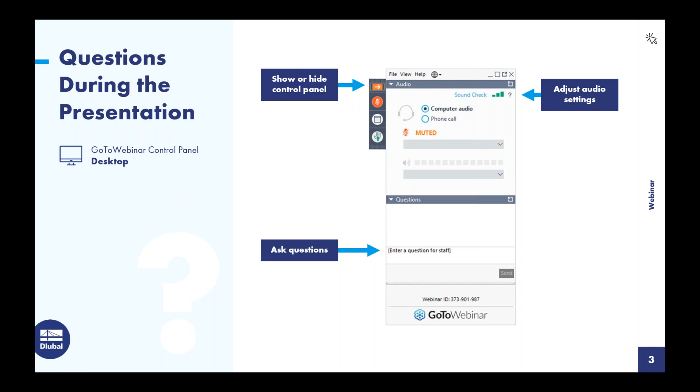Regarding the content over the next hour today, I do want to give a brief introduction to the dynamic analysis add-ons within our FEA program, RFEM 6. We will be taking a look at the natural vibration analyses of our structures utilizing the modal analysis add-on. And we'll also introduce external excitations over time utilizing our new time history analysis add-on in RFEM 6. We'll be working through a couple of examples.

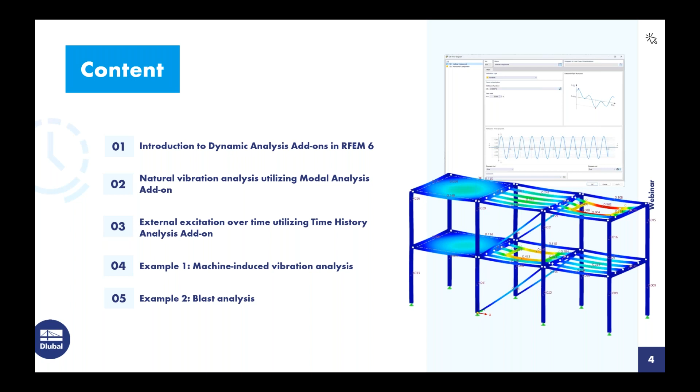The first is going to be machine-induced vibrations with the structure shown over here on the right-hand side of the screen. And finally, a quick example at the end to showcase a blast analysis, also utilizing that time history analysis add-on.

So for those of you not familiar with our program configuration, RFEM 6 is the base program that allows us to fully model the structure where we have access to the materials and cross sections from the various standards. We can load the structure and run a full static analysis. But when you need dynamic analysis capabilities, it will require one of the 4 add-ons listed here. The first is the modal analysis add-on. So this allows us to calculate the mode shapes of our structures and determine the natural frequencies, periods, and angular frequencies of the structure. So this is a prerequisite for the additional add-ons that you see listed here.

The second is a response spectrum analysis. So this is a seismic analysis according to the ASCE 7, the NBC, and other international standards that we offer. We also have the recently released pushover analysis. This is a nonlinear analysis for seismic deformation behavior, and currently this is according to the N2 method. And finally, we have our linear time history analysis. So this is to introduce external excitations as a function of time. So today we'll be working in both the modal analysis add-on as well as the time history analysis add-on.

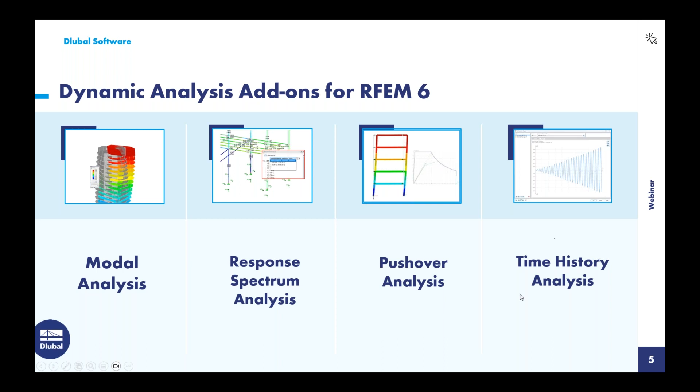So to turn here to the features within the time history analysis, we certainly have improved the integration and the workflow in our new version RFEM 6. When we compare this to RFEM 5, it was a little bit of a 2-part process, quite a bit different to open up the dialog box, then to define all of the dynamic time history analysis settings. Now you'll see in RFEM 6 a much more fluent workflow where we can better see that add-on integrated in the main program. We can combine user-defined or function time diagrams with nodal, member, surface, free, and generated loads. So the point being that we have the ability here to include many different load types in correlation with these time diagrams. We can also combine multiple independent excitation functions for one analysis. We'll see this with our first example today.

We do offer the linear implicit Newmark or the linear modal solvers. And it should be known that currently in the program all nonlinear elements for a time history analysis are going to either be ignored or converted to linear elements. So for example, if you have failure in uplift for a support condition, this will simply be converted to a standard support for that dynamic analysis. Same concept with a nonlinear tension-only member. Internally, this will automatically be converted to a truss element. We can consider structural damping with the Rayleigh damping coefficients or the Lehr's damping values.

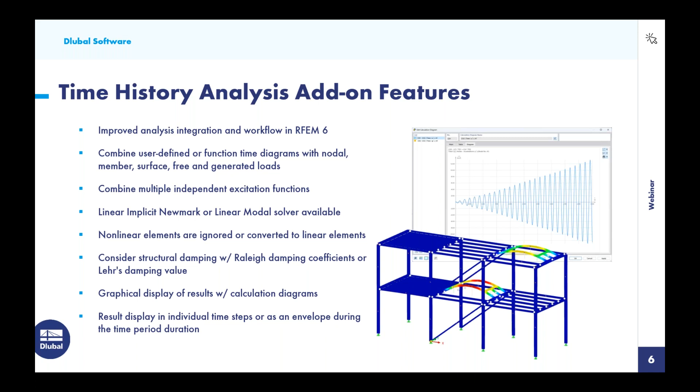And finally, when we do run our calculation, we'll see an output of the graphical results displayed, but also we can create what we call calculation diagrams. So we see a calculation diagram shown over here on the right-hand side, which just gives us a better idea of what's going on with the structure over that total time duration. In addition, we can display these results for each individual time step or as an envelope solution during the entire time period. And we'll work through most of these topics today with our examples.

So we'll begin here with example number 1, where we are going to introduce these machine-induced vibrations with the steel industrial structure that you see here on this slide. We have 2 rotating machines, and you can see here where these machines are going to be placed. We have one at the upper level where this opening is on the right, and then at the first level here at the center, we'll place that second machine.

So these machines are operating at 325 rotations per minute. The mass of the machine is 2,000 pounds, or converted to 62.16 slugs. The mass of the rotor is going to be 700 pounds, which converts to 21.76 slugs. And the rotor is going to be operating at an eccentricity of 0.75 inches.

Therefore, we want to calculate the excitation frequency here. So we just simply take the 325 rotations per minute, we divide by 60 seconds, and we get a value of 5.42 hertz. So this is a really important number to remember and will come into play a little bit later on, but just remember this excitation frequency magnitude here. The angular frequency is calculated by simply taking the excitation frequency, multiplying by 2 pi, and we get 34.03 radians per second.

And finally, we want to calculate the centrifugal force. So the centrifugal force is the angular frequency squared, multiplied by the eccentricity, converted to feet, multiplied by the mass of the rotor in slugs, and we get 1.58 kips.

Now, in order to apply the centrifugal force at these openings, we simply need to divide here by the total length of the members that make up this opening, and that's 33.6 feet. So we get a value here of 0.047 kips per foot that will be applied to the members. So this will make a little bit more sense when we go into our program RFEM to review the structure here.

So as you'll notice, we have our industrial steel structure, and the cross sections are composed of W shapes. So we have a W8x35, we have W6x9, and then for our diagonal bracing here, we have W4x13. We do have a couple concrete platforms here. If we take a look at the thicknesses, these are going to be 4,000 PSI concrete, 6 inches thick.

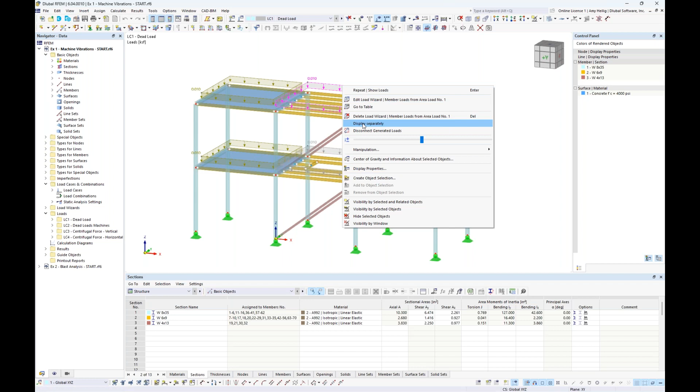So we also have the loads defined. So within the dropdown at the top, I have 4 total load cases at this point in time. We have our dead load, which is automatically going to include self-weight, but notice here that I also have applied an area load. So we have 10 pounds per square foot applied to the structure at both levels. The area load applied over on the right-hand side was used with our load wizard so that we could correctly allocate this to the members based on a one-way area load distribution. So we can right-click to display separately to see those magnitudes here.

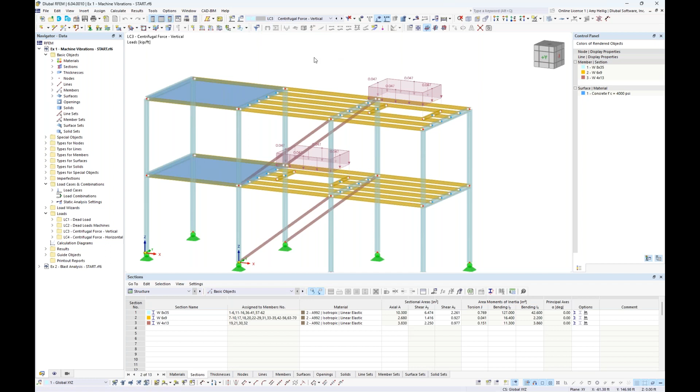Now, in addition to the basic dead load, we also have the dead load from the machine. So this is essentially just the force of the machine sitting on the structure, 0.08 kips per foot. Then going back to the PowerPoint, we have those 2 centrifugal force load cases. So we have load case number 3 here, which is that centrifugal force in the vertical direction. So notice this magnitude 0.047, which again just came directly from the PowerPoint.

If we're curious to know the total length of these members around the opening, we can hold down our control key to select all of these members. You can right click, and under the center of gravity and information, we do see here the total length given to us as 33.6 feet for these selected items.

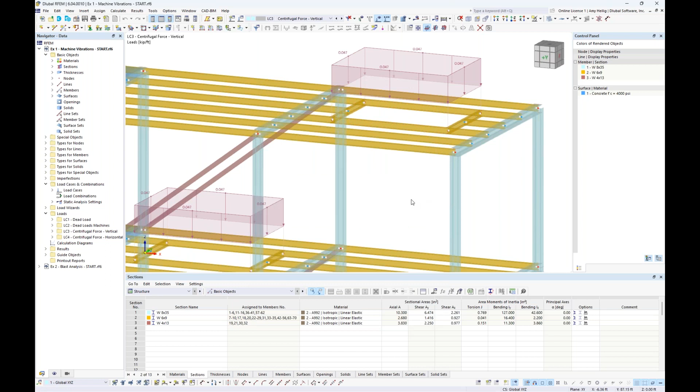So we have the centrifugal force in the vertical direction, and we also have the centrifugal force in the horizontal direction. So identical magnitude here of 0.047, but of course we want it to act in that horizontal position based on the global x-axis here on the structure.

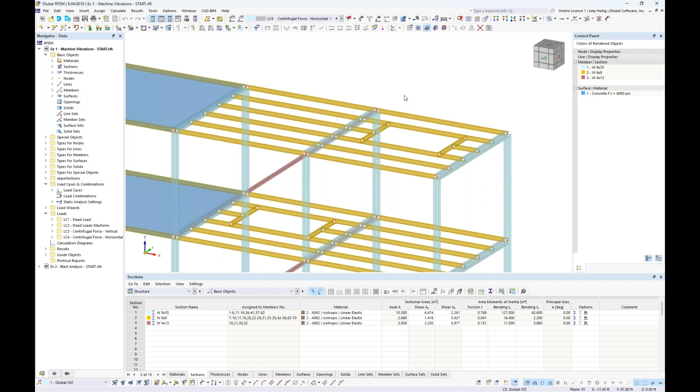So now that we have reviewed the structure as well as the loads, what we would like to move forward with now is our dynamic analysis. And we activate these add-ons by right-clicking here on the model name within the navigator to access our base data. Alternatively, we can launch the base data directly here within our quick tools up at the top.

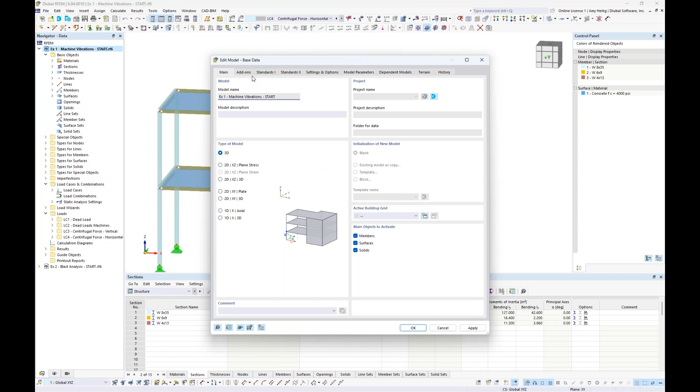So this is the dialog box that would be presented to us when we initially first create the model in RFEM, but we can always access it afterwards as well. Under the second tab here are all of our optional add-ons. So again, RFEM is responsible for the standard static analysis, but we want to activate our dynamic analyses add-ons. And for today, we'll go ahead and turn on the modal analysis and the time history analysis as well.

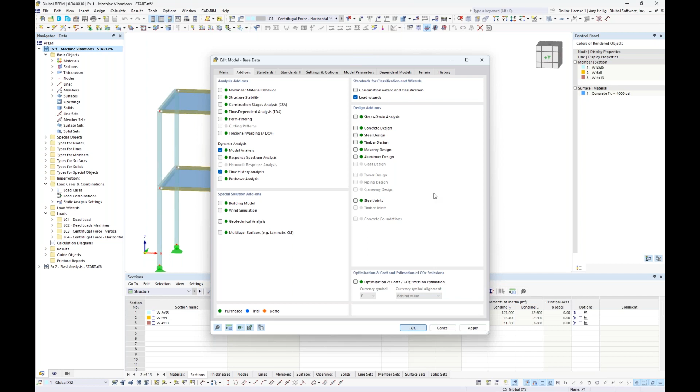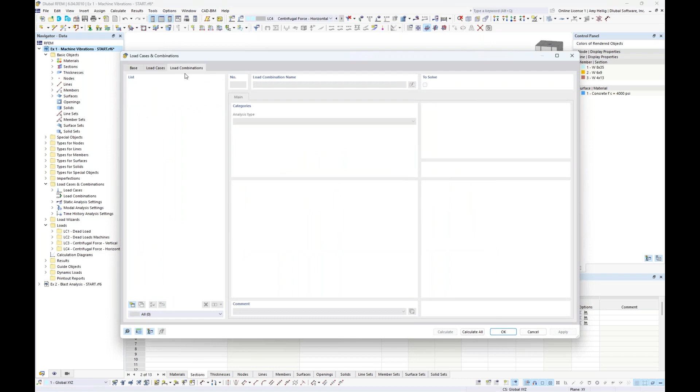So when I click OK, at first glance, it really doesn't appear that much has changed, but we want to move forward now with our modal analysis for this structure to determine what those natural frequencies are, mode shapes, and so on. So we're going to go into our load cases and combinations dialog box. And the initial step that I want to take is under the load combinations. We're going to create a new definition type here.

And in order to carry out the modal analysis, I do need to convert my dead load forces into masses. And I would like to combine the dead load from the structure, so that includes the self-weight, but also that 10 pound per square foot area load, but also take into consideration by adding the dead load of the machines. So both of these will be considered, and we can also rename this one for our mass combination.

So now that we have created this simple mass combination, we go back to our load cases here, and we're going to create a fifth load case. And we're going to give this one the name modal for modal analysis. So rather than carrying out a static analysis, we want to use our dropdown to select modal analysis. And this is available because I've activated this add-on within the base data dialog box.

So here we have some additional settings that we would like to set for the modal analysis in particular. And we do have two default options here. So you could either modify these default options, or you could create your own definition type down here in the lower left corner. For today, I'm going to increase the number of modes to a total of 15 for my calculation. We'll carry out the eigenvalue problem according to the Lanczos solver, and we're going to utilize a consistent mass matrix here, taking into consideration the mass in the translational X, Y, and Z directions, as well as rotational about the X, Y, and Z axes.

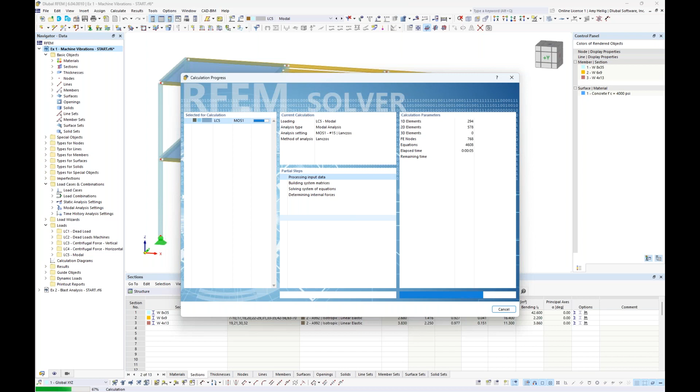So now that we have input in all of this information, we can run our calculation. So the program will quickly run through this modal analysis, calculating a total of 15 different mode shapes. And once the calculation is done, you'll notice that we get a fourth tab over here in our navigator where we can use our drop down here to select one of the 15 different mode shapes that we have solved for. And everything will sync up graphically here to show us our relevant shape.

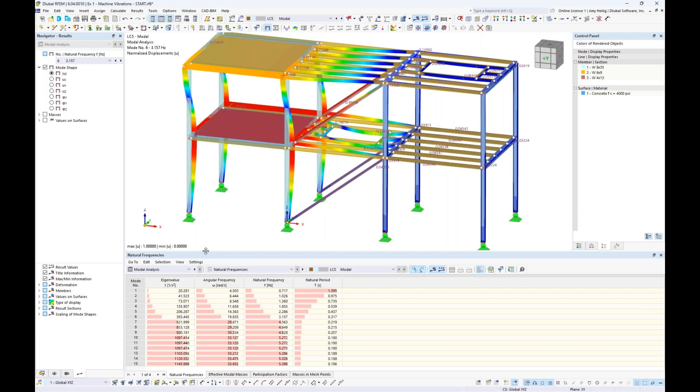But also we have the same information available to us here in the drop down within the table. So we can select the modal analysis. And again, those 15 different mode shapes are going to be shown that we can cycle through graphically within the table format. Now for each of these mode shapes, we also see the relevant angular frequency, the natural frequency, and the natural period.

So it's also important to take a look at the effective modal masses tab. So this tells us our mass participation for each one of these mode shapes, but also the total mass participation down here at the bottom for all 15 mode shapes combined. And we'd like to determine what are our dominant mode shapes for this modal analysis.

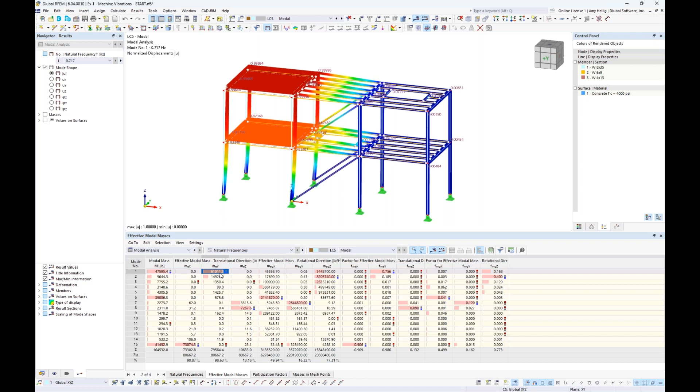So taking a look at mode shape number 1, we can see that this one has the most mass participation in the Y direction. So this is certainly a dominant mode in the Y direction. We take a look a bit further down, it looks like mode shape number 8 would be our dominant mode in the vertical direction or the Z direction.

Pretty relatively low mass participation though in this direction of only 13%. And then finally, further down, mode shape number 15. So this is our dominant mode here in the X direction. We have a total mass participation of 90.87%.

So keeping mode shape number 15 in mind, we go back to the natural frequencies tab, and what you'll see here is a natural frequency value of our structure of 5.388. So this is in Hertz, and if you remember back to the PowerPoint, I had mentioned to keep this value in mind, and you'll notice that these two magnitudes are very close together. So this should immediately tell us that we're inducing these excitations with an excitation frequency that's very similar to the structure itself, that we need to carry out a time history analysis.

And ultimately, we're trying to avoid what we call resonance. So most of you are probably familiar with this term, but it's essentially a phenomenon that occurs when a structure is subjected to an external force or vibration. In our case today, it's these rotating machines that's of similar magnitude to its natural frequency. And this typically results in an amplification of the vibration.

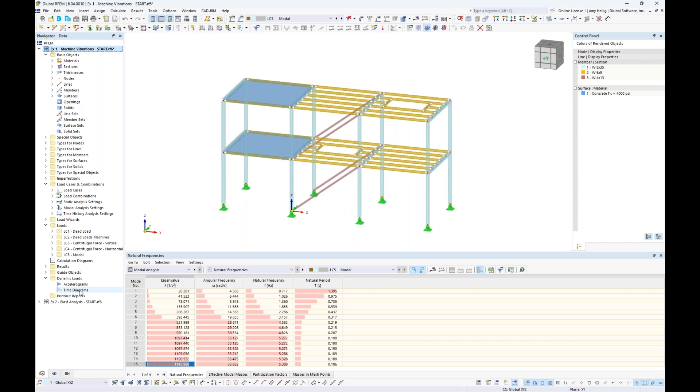So going back to RFEM and knowing that these two frequencies coincide, we'll now move forward from the modal analysis to the time history analysis. So we'll begin with the time diagram. So going back to the first tab here of my navigator, you'll notice that we have a new folder available to us under dynamic loads. And this is only available because I've activated that time history analysis add-on. And we see here where we can create our first time diagram definition type.

So we'll go ahead and click on this, and the dialog box opens where we can input either a user-defined time diagram, which you can see in table format. We can put in the time and we can put in the multiplier, essentially telling the program how this force is going to vary over time on the structure. Now, alternatively, we have the function option, which is what we'll be utilizing for this first example. We can go ahead and rename this time diagram if we would like as well.

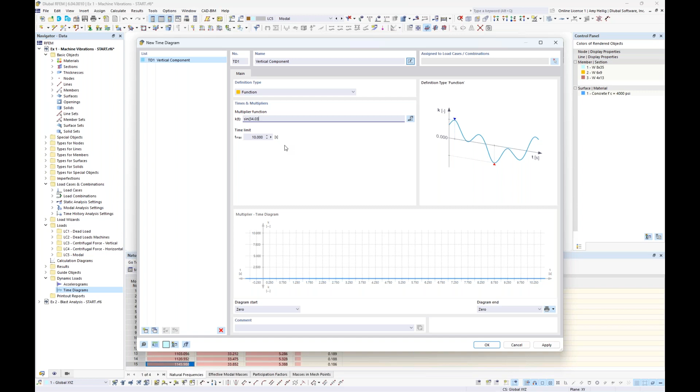So I'll call this one vertical component, and the multiplier function would now be input as a sine function. So remember, we have these rotating machines, therefore we want to represent this as a sine function where we input the sine of the angular frequency, which is 34.03 directly from our PowerPoint, and we multiply it by the time parameter. We'll go ahead and close these parentheses. We set the total time limit here to 10 seconds, which is just default. And we see our diagram populate visually at the bottom of this dialog box.

We then want to make a copy of this time diagram, and we're going to rename this one to horizontal component. Very similar multiplier function here with the sine of the angular frequency, but if you also remember back to the PowerPoint, we have this pi over 2 phase shift that's occurring between the horizontal and the vertical force. Therefore, in order to account for this directly in the formula, we will add 1.57 to account for pi over 2. Again, 10 seconds is adequate.

So if I hold down my control key and I zoom in here with my mouse wheel, we can see this diagram in a bit more detail. So for the horizontal component, you'll notice that at time equals 0, we essentially have 100% of that load acting on the structure. But as we move to a time duration around 0.04, we're going to have 0% of that horizontal load acting on the structure. Now, if we toggle to the vertical component, what we should see here is exactly opposite. At time equals 0, we have 0% of the vertical load. And at time equals 0.04, we have 100% of that load acting on the structure.

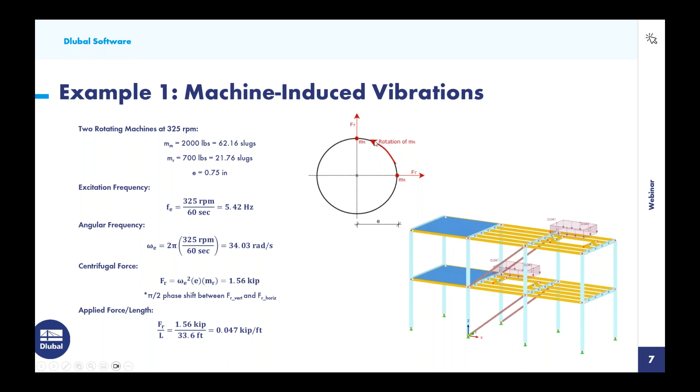So this all just goes back to this simple diagram in the PowerPoint, trying to represent these centrifugal forces as a function of one another. That again, we have 100% of the force acting in the horizontal direction, but at a phase shift of pi over 2, we want to in turn change this so that 100% of the vertical load is acting on the structure. So these time diagrams just relate these static centrifugal forces to one another and how they're going to vary over time.

So now that the time diagrams are available over here in our navigator, we want to go back to the load cases and combinations, where under the load combinations tab, we're going to create a new definition type here, and we can give this one a name of time history analysis. The analysis type is not static analysis, but rather time history analysis available in our dropdown.

And very similar to the modal analysis, we just need to input a few settings here. So we'll go into the default definition that's available to us, and notice that we have two options here for our analysis method, either the linear modal or the linear implicit Newmark. So we will be moving forward with the linear modal for this first example.

And this is certainly a more precise, quick, and recommended path forward for the analysis method if the structure has a low number of modes that have been calculated with the modal analysis add-on. This is also assuming that we have sufficient mass participation as well. But underneath the hood, that multi-degree of freedom system is going to be broken down into many single degree of freedom systems, and the solution of that decoupled system is then going to be calculated with the implicit Newmark solver.

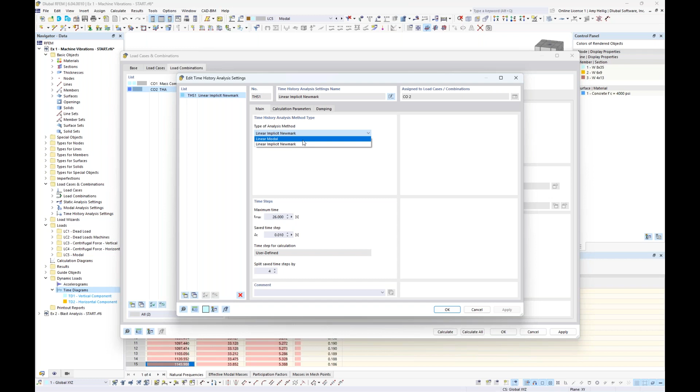Now, the maximum time is the total time duration that I would like to consider for this time history analysis. And for our example today, we will choose 5 seconds. The save time step is the number of steps you would like to export back into RFEM to view the results. So obviously we don't want to set this to something too small because it's just going to take the program a lot longer to populate all of those results. So we'll leave this as 0.01.

Now, the split save time steps is further going to divide the save time steps, but this is what's actually used in the calculation itself. So I'm going to further divide this by 10 so that technically with the actual calculation, I'm calculating every 0.001 seconds, but I'm only going to export 0.01 seconds for my results.

Now, additionally, you'll notice that we do have a damping tab, and for the linear modal analysis, we have both Lehr's damping available where we can directly input the damping constant, quite simple. We also have the Rayleigh damping where we would need to input the alpha and beta coefficients. Now, alternatively, just to show you, under the linear implicit Newmark, you'll see under damping that only Rayleigh is offered. So that alpha and beta is required for this calculation method.

But we do have a function in the program where we can automatically calculate from Lehr's damping. So you'd want to determine from the natural frequency analysis, what are your two dominant modes? And from these two dominant modes, what are the relevant natural frequencies? What's the Lehr's damping constant you're trying to achieve? And then the program will automatically calculate both these alpha and beta coefficients. But going back to linear modal, initially we're not going to put in any damping for our first calculation here.

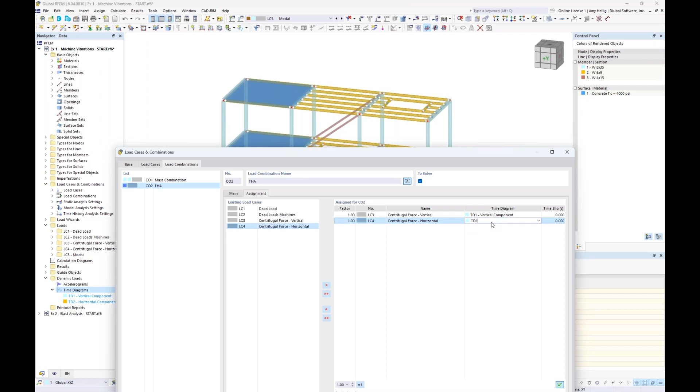And the first centrifugal force in the vertical direction is, of course, going to be related to my time diagram in the vertical direction. But my centrifugal force in the horizontal, we want to set this to the time diagram in the horizontal direction as well.

So now that we have set the static load cases to the relevant time diagram, we would like to run this calculation. Now we don't need to rerun the modal analysis. The program has already solved for this. Our results are saved here. And then we move on to the time history analysis, taking into consideration the full 5 seconds of how these rotating machines will be directly applied to the structure. So once this is done solving, we are presented yet again with our results directly within our navigator on the left for time history analysis, as well as in our table, we see time history analysis available here as well.

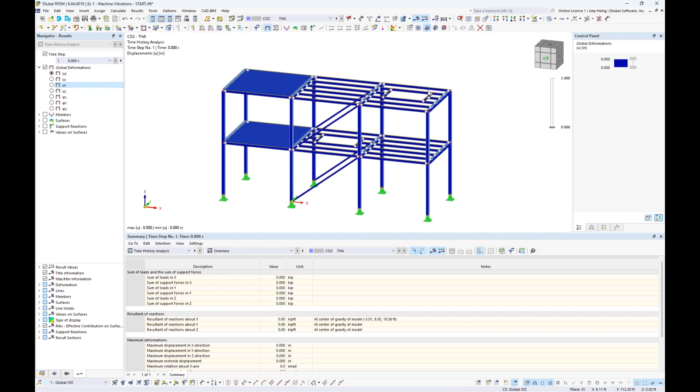So initially you'll notice that the program allows us to view, let's say, the global deformations of the structure based on the relevant time step. So currently at time step 0, nothing's going on with the structure here in terms of the deformation. But as we continue to cycle through these time steps, that's where we start to see the relevant deformed shape based on those centrifugal forces acting on the structure.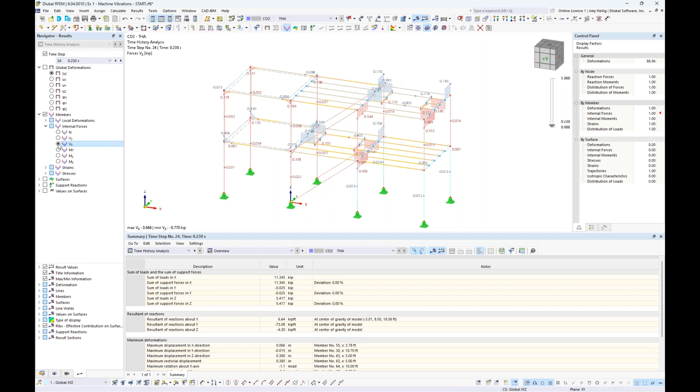And the same concept is available for other result information like our member internal forces. So for example, we can view the axial forces at this particular time step, or we can view bending moments, or perhaps we want to view the shear forces. Surface internal force information is available, and also support reactions. So we can turn those on again for this particular time step.

And all this information is also available here in table format. So we can filter here to the results by the member, for example. And as we click through this table for the internal forces on the member, what else you'll notice is that the program syncs up automatically here to tell me exactly which member I'm looking at. And that red arrow is going to point to where the controlling internal force is that I'm currently viewing along the length of the member.

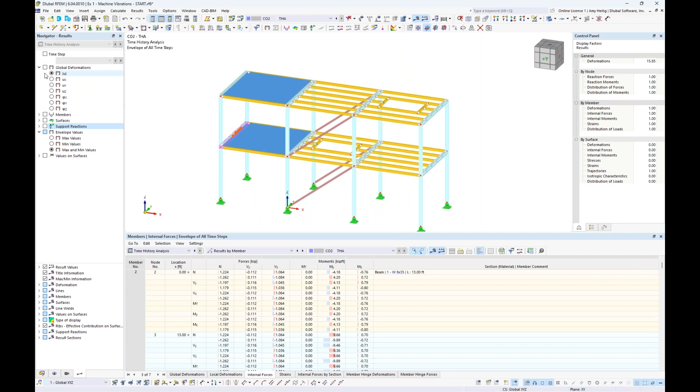So this is for each individual time step, but if we're rather interested in an envelope solution for the full 5-second duration, we can just simply turn off this checkbox. So now the program is going to give us our results here over the total time duration. So we can turn on, for example, the global deformations.

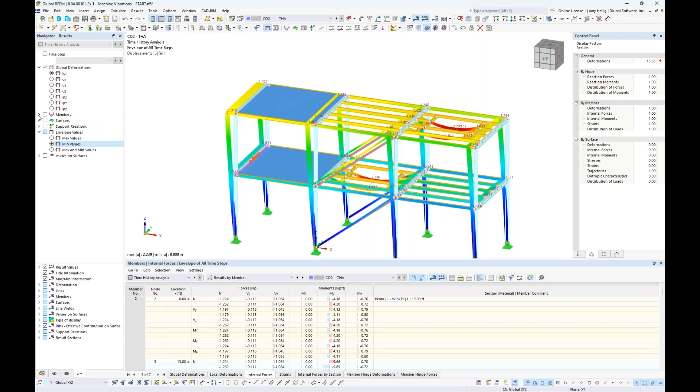And if we look graphically, we're seeing 2 deflected shapes here. And this is just simply because you'll notice under the envelope results that both the max and the min values are currently turned on. If we're interested in only the max deflection, we can toggle to this, maybe only the min deflection. Same concept for our member internal forces. So for example, if we take a look at max and min for our axial forces, you're going to see both of these values displayed on the member, but we could certainly toggle to any one of those other options.

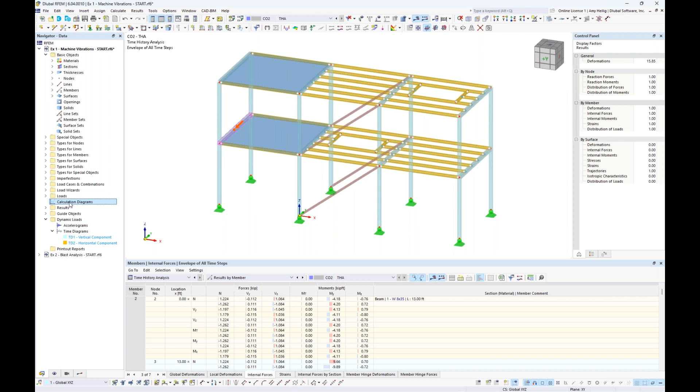Now, all of this information shown graphically is certainly very helpful, as well as in table format, but I do want to go back to the navigator here to discuss the calculation diagram. So I'll go ahead and collapse some of these folders, and you'll notice the calculation diagrams is available here directly within the navigator list. And this is going to be highly used for any time history analysis. So this is going to give us more information about the structure's behavior over the total time duration.

So under the first definition type here for my calculation diagram, we want to toggle this to a time history analysis. Now, the program is automatically going to display a diagram here based on the max deformation. But notice within this dropdown that we really have a lot of different options to choose from, including nodes for the global deformation, maybe want to view the accelerations on the nodes or member internal forces.

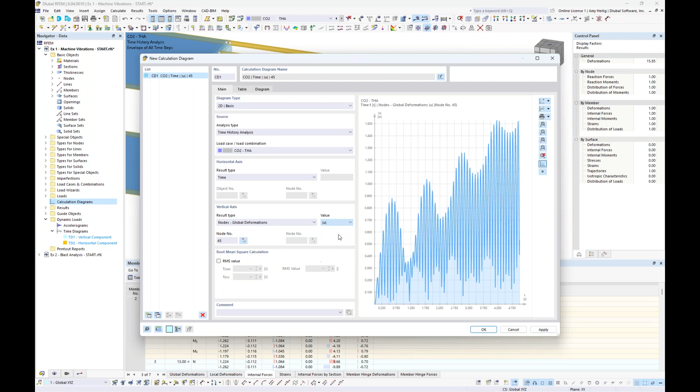So I'm going to start here with the global deformations of the nodes, and I'm going to pick this particular node up here at the opening where one of my machines is sitting. And currently the value shown here under this second dropdown is going to be the total deformation, considering all three directions, X, Y, and Z. But instead, I'm going to view the deformation in the X direction only.

And when we take a look at this, we can clearly see that resonance is an issue, that this deformation in the X direction is just continuing to grow as time goes on. And likely if we were to expand the total time for a time history analysis, it would just continue to grow. We see here a value of 1.4 inches.

So if we toggle instead to something like our acceleration on this node, and we want acceleration in the global X direction, again, the diagram looks very similar. So if we take a look at the total magnitude here of this acceleration at the end of the 5 seconds, it's 141 feet per second squared. So this is certainly not an acceptable value.

And when we're interested in what are some of the recommended acceleration limits, there's plenty of resources out there. If we take a look at AISC Design Guide 11, for example, it really depends on what your structure is going to be used for. Something like an office is going to have a much lower tolerance value for acceleration versus something like a gym.

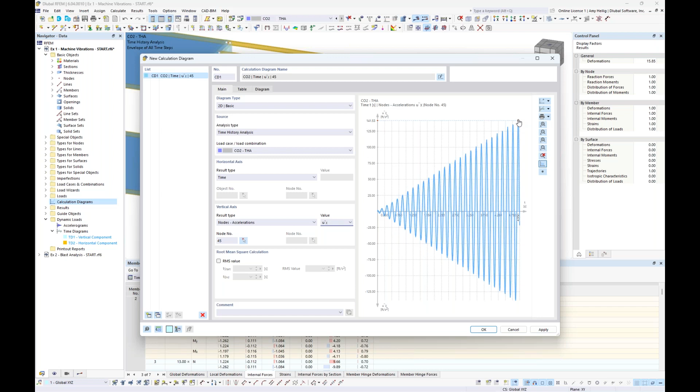But somewhere at the low end, it should be around 0.5% G, and somewhere at the higher end of acceptable tolerance values here is 5% to 10% G. But in any rate, we are far over that with this particular structure. So we need to make some modifications. And the first thing that I would suggest doing is to consider damping.

So we'll go back to the load combination here and that time history analysis. We've already been within these settings before under the damping. So this time we want to consider using our dropdown, the Lehr's damping constant. So for this particular steel structure, we'll go ahead and set this at 0.02. So we'll click OK. The program tells us we need to delete our results and rerun the calculation.

Now, nothing changed with the modal analysis. We should see the same results there. But now with this time history analysis, we've introduced the damping matrix in consideration with the dynamic analysis. So we should see slightly different results here now that we're considering damping.

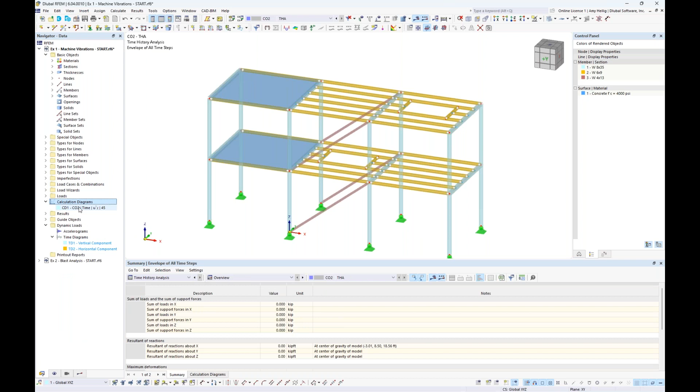So now that this is finished, we will immediately go back to that calculation diagram. So we can see it listed here in our navigator. We don't need to redefine it. It's already been saved. We're currently looking at the acceleration of node number 45 in the X direction, and our diagram certainly looks slightly different. We're not seeing maybe those accelerations growing linearly, but rather leveling off.

If we take a look at the total magnitude of the acceleration, it is around 40.79 feet per second squared. So this is probably still an issue. The acceleration is far too high. So we need to continue to make additional modifications to this structure.

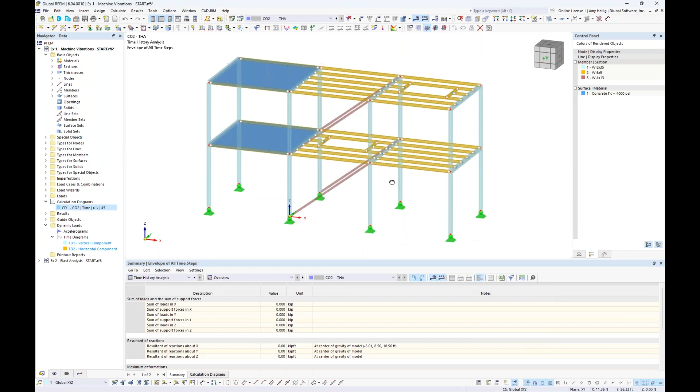Well, the obvious choice would be to change out some different cross sections here. Maybe we can modify the cross sections, which will in turn affect the stiffness, and our modal analysis may output different natural frequencies now that don't necessarily match the rotating machine. So we can do this directly with the cross sections listed. So for example, these diagonal braces, W4x13. We could simply double click and exchange out to a different W section.

But the question might be, well, do we go with a cross section that is bigger? Do we go with a cross section that's smaller? And we could certainly trial and error and keep running through these different calculations. But I'd like to show you a different method, which is available under the special objects folder. It is called the structure modifications.

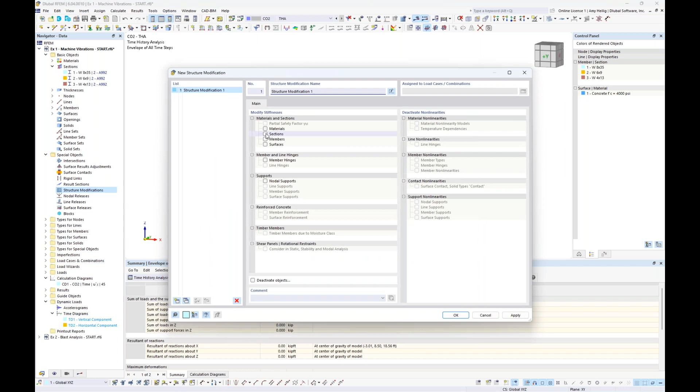And we can go ahead and double click to create our first structure modification where we activate the sections option. And we get a new tab here under sections with our 3 different W sections, including the W4x13 for those diagonal braces. And we have the ability to directly apply a factor to the cross-sectional area, which in turn is going to increase or decrease the axial stiffness of the member used in the calculations. So rather than exchanging out the cross-section, we can just more or less play around with the stiffness properties directly to see how our structure is affected.

So under the W4x13, the first thing I want to do actually here is to give it a name. We'll call this one double stiffness, and the area factor will be set to 2.0. The area in the Y is also set to 2.0, and area in the Z is 2.0. So again, just increasing the stiffness twice the amount here.

Now we're going to make a copy of this structure modification, and we'll call this one half stiffness. So in this scenario, instead of applying a factor of 2.0, we'll apply a factor of 0.5, just to again see how the structure responds to maybe a smaller cross section without actually swapping out those cross sections quite yet.

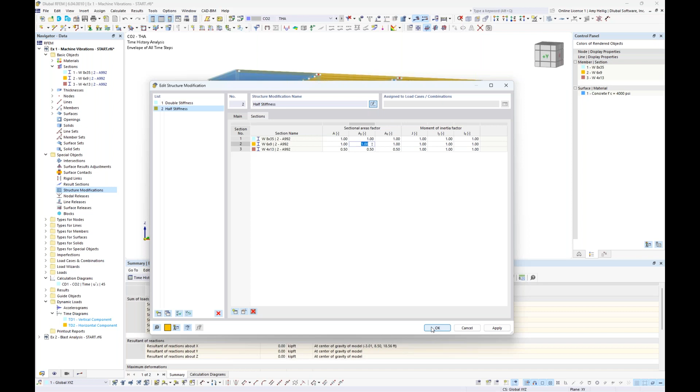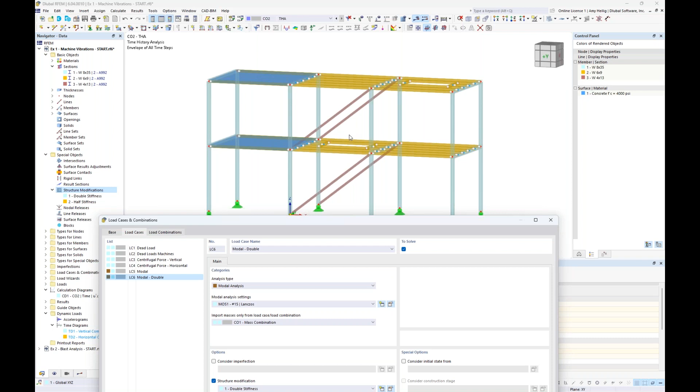So now that we have these structure modifications shown here, we can go back into our load cases and combinations. Under the load cases, remember we have our modal analysis with no structure modification sets, just originally the results that we have already looked at. But I'm going to make a copy here, and I'm going to call this one double for double stiffness. Under the structure modification, we can turn on that definition for double stiffness that we just created. Again, where we're going to increase the axial stiffness times 2 for these diagonal braces.

I'm going to make an additional copy here, and we're going to rename this copy half so that we can activate here half the stiffness for the diagonal braces. Well, it's not just enough to do it for the modal analysis, but we also need to apply this to the time history analysis. So again, I can simply create a copy here, and with our original time history analysis, we will first rename it, but notice that with the linear modal, we can now import in the modal analysis where we have increased the stiffness by 2.

The program automatically detects that we also want to apply this structure modification to the time history analysis, because remember we have these static load cases that vary over time. So we need to also apply that stiffness modification to this scenario here. And we make an additional copy, and in a similar manner, we call this one half, and we're going to import in the modal analysis with half the stiffness set. And then you can see here the structure modification half stiffness is also set for the time history analysis.

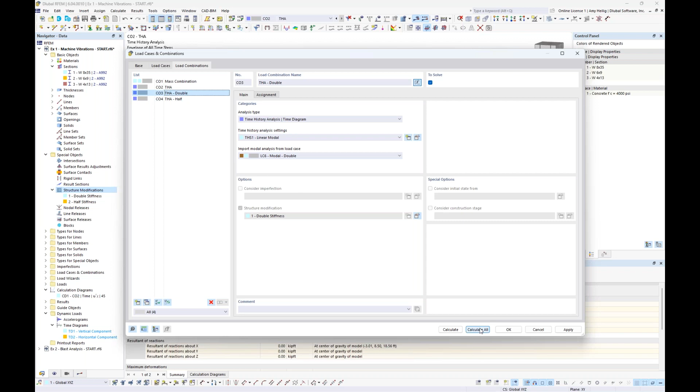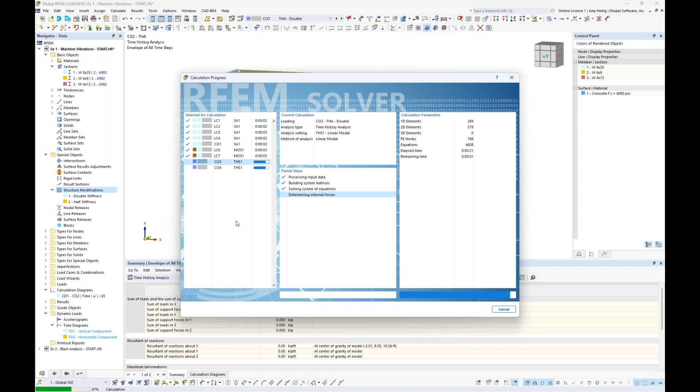Okay, so now that these are run with the relevant stiffness properties or modifications set, we can just go ahead and click calculate all. So this is going to cycle through first my load cases here, which is fine. We're not really concerned with them. But then you'll also notice that the program is going to go ahead and calculate both of those modal analyses with the stiffness modification set, and then we're now running through both time history analyses with the additional stiffness modifications.

So the first thing that I'll go to now that the calculation is done is those calculation diagrams. So we'll go ahead and double click on here, and we see the same calculation diagram, but that's fine because we're still referencing that original time history analysis with the same cross sections, same stiffness, nothing changed.

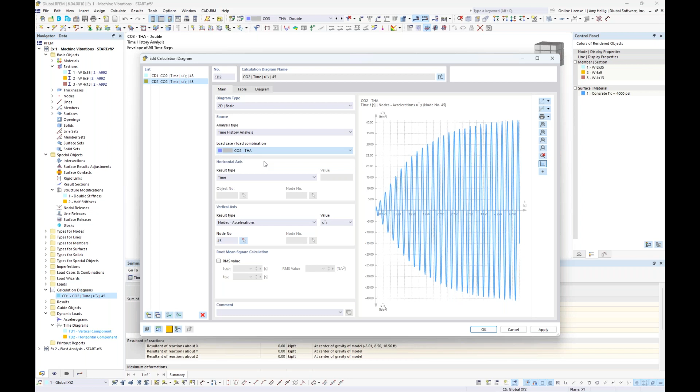We make a copy of this, and this time we want to reference the time history analysis with the double stiffness. And now we see that our acceleration of that node in the X direction looks quite different. No longer do we see that acceleration growing, but rather it remains pretty constant over the 5-second duration. And if we take a look at the total magnitude of the acceleration, it's now around 0.4 feet per second squared. So this is much better and well within those tolerance values.

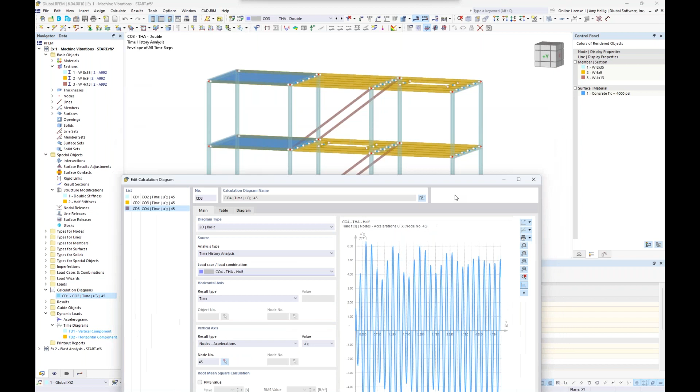Perhaps we make an additional copy here to select half the stiffness. Again, resonance is no longer an issue. So we don't necessarily always have to increase the cross-section size. Even decreasing a cross-section size may allow you to overcome issues like resonance.

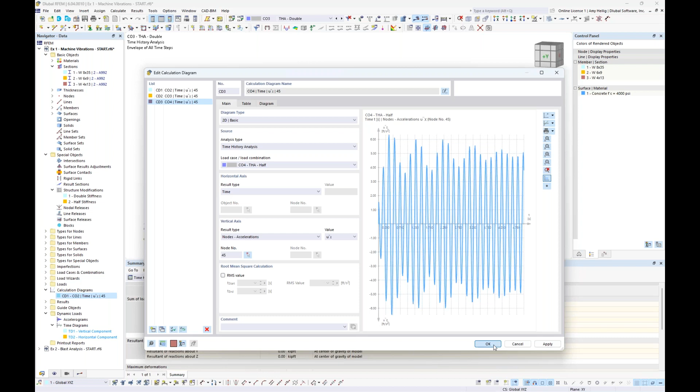However, we do need to still take a look at the total acceleration values, a little bit higher here, around 4 to 5 feet per second squared. So it'd be up to you as an engineer to determine, okay, is this within the allowable range, or do we need to make further modifications? But once we have an idea about the general stiffness options based on those factors, then we can go in and make modifications to that W shape.

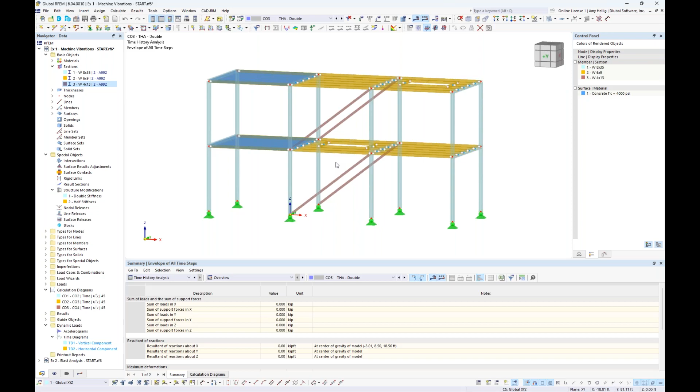Okay, so that will conclude our first example today with these induced vibrations on the structure. We now want to turn to our second example. So we'll go back to the PowerPoint here, and this is going to be blast analysis. So with the blast analysis, we certainly can utilize the same add-ons, a time history analysis add-on, to replicate a blast analysis on a structure. So very simple example for today.

You can see it outlined here with the reference given at the bottom of this slide, that we have some type of cylindrical structure. So this is the plan view of that cylindrical structure. Perhaps we have an explosion somewhere in the exterior here. Therefore, we have this incoming pressure wave. And you'll notice that based on this reference, the incoming pressure wave, the magnitude of this pressure varies as we move around the perimeter of the structure.

So ultimately, we want to replicate this in RFEM, and we do so with what we call a free load varying along the perimeter. And here's just a couple screenshots that we will visit in just a minute within the RFEM model itself, but we do have the ability here to replicate this loading.

Now, when we talk about blast analysis, it's quite common to represent the blast as a triangular shaped development of load versus time. And that's what you'll see here at the bottom of the page, that over a very short duration of time, 0.15 seconds, we're going to see that load increase linearly to 100% for the pressure wave, and then in an equal manner, it's going to dissipate quite quickly at 0.3 seconds total. So we also want to replicate this with a user-defined time diagram. So you can see that triangular shape shown over here on the right-hand side.

So let us go into the RFEM model directly, where we'll go ahead and toggle to this open model here. So you'll notice that for this very simple example today, we have a 32-foot high cylindrical structure, 33 feet in diameter. Really consists of a single surface here. And if we take a look at the thicknesses, it's going to be A36 material, 2 inches thick. Also, we have a pin support down here at the bottom that is applied as a line support.

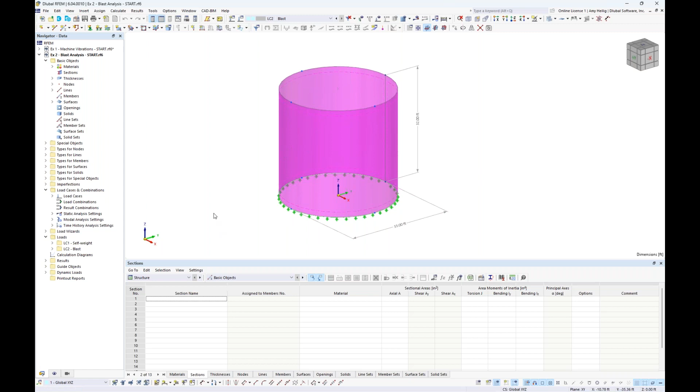We also have the loading applied. So we have 2 simple load cases for this example. We have the self-weight, which no additional loads are applied to the structure, just internally that self-weight is considered within this load case automatically. But then we also have that blast load. So this comes from the PowerPoint and the reference mentioned, where we wanted to vary this load around the perimeter.

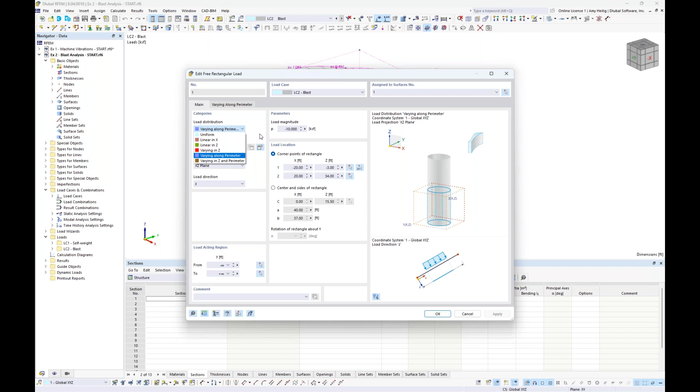And we take advantage here of what we call a new free rectangular load. So with the free rectangular load, if I go ahead and double click on the options here, you'll notice that the load distribution can be set to varying along perimeter. And I also wanted the load to act normal to the face of the surface. So this is based on the local z-axis of the surface itself. We also need to input in here a reference load magnitude, so -10 kips per square foot.

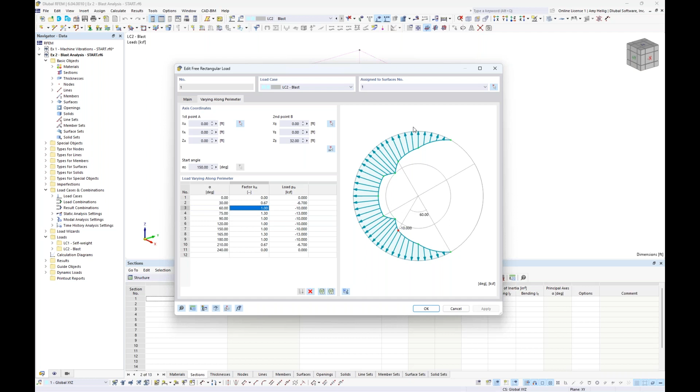So taking a look now at the second tab that is available, we see in table format where we can input in degrees. So this first column, 0 degrees, 30 degrees, 60 degrees, and so on. We can also input the relevant factor. So again, this just comes from the PowerPoint, and then the program will automatically take this load magnitude here and the parameters set in this table to calculate the total load acting on the structure and how it should vary, again, as we kind of move around the perimeter. So that's a little bit about just the basic static load that is applied here as a general load case.

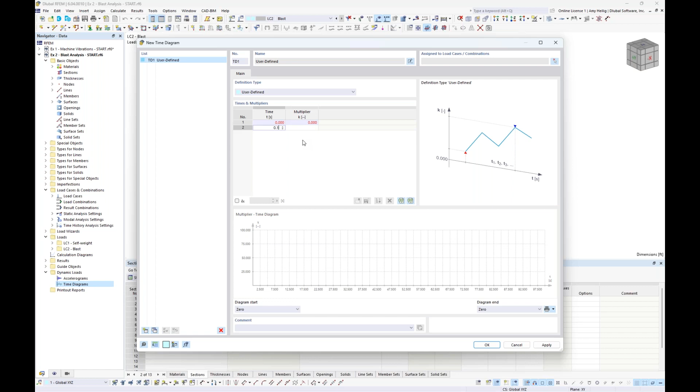Now, we want to define that time diagram. So I will go into my navigator over on the left in the dynamic loads folder, where very similar to the last example, we just double click here the time diagram. And this time, instead of using the function, we want to set this to user defined. And for a very simple application today, at time equals 0, we want a multiplier of 0. At time equals 0.15, again, just referencing the PowerPoint, we want the multiplier to be 1. And then finally, at time 0.3, we would like the multiplier to be 0.

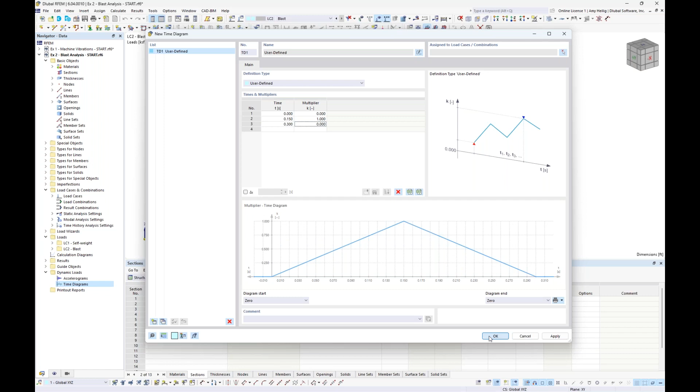So we see this triangular shape displayed here that will be used to tell the program how this static pressure load that's shown here in the background is going to vary over time. So a very quick impulse, so to speak. So we have this single time diagram defined. So we click OK, we see that listed over here in our navigator. And we want to go into the load cases and combinations.

So I will preface that for this particular time history analysis, I'm going to run a linear implicit Newmark solver. So this is in contrast to the linear modal solver. What this means is that I don't need to run a modal analysis. So everything that we saw in the first example, that modal analysis was required because we were running the modal solver. And unless we're interested in determining what the structure's natural frequencies are, periods, mode shapes, and so on, we really don't need to run the modal analysis calculation here in the load cases for a linear implicit Newmark solver. So immediately we jump to the load combinations instead.

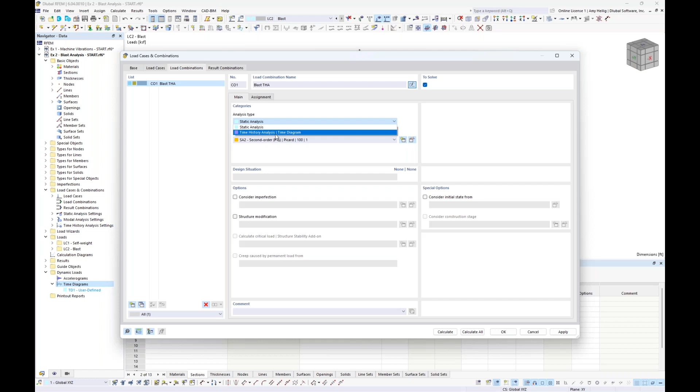We create our first definition type here. And the load combination name can be set. We will call this one BLAST time history analysis. You'll see here that the analysis type is set to time history analysis rather than static. And very similar to our last example, we have our settings. Now, the type of analysis method here is set to linear implicit Newmark. The total maximum time is going to be 1 second. So typically with a blast analysis, we don't need to carry out the time history analysis over a long duration of time just because that load impulse is so quick. So 1 second should be adequate here.

The save time step will be set at 0.01. And then we further want to split the save time step here by 10. So remember that this is the value that's actually used here within the calculation. So we'll technically be using 0.001 for this linear implicit Newmark calculation, but we're going to export out every 0.01 seconds into RFEM to view those results graphically.

Under the calculation parameters, because we are not running that modal analysis, you'll also see here just some additional settings specific to the mass matrix for the linear Newmark solver. The type of mass matrix will be set to consistent, for example, acting in the translation directions as well as rotation about those global axes. And then we also have the same mass conversion type, similar to what we saw in the modal analysis in example 1.

And finally, we have the damping. So for this example, I'm not going to consider damping, but it's worth pointing out again, remember that with the Newmark solver, we only have the ability to define Rayleigh, or we can allow the program to convert from Lehr's damping. Again, we'll leave all of these values as 0.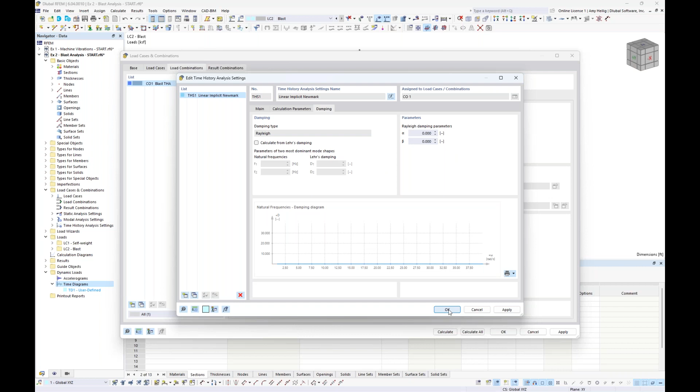So we need to import in the masses from either a load case or a load combination. We don't have any mass combinations that we created for this example. Rather, I'm just going to import in the masses from self-weight alone, and that's available within this first load case.

And finally, we have the assignment tab where we take this blast load, and we can see it displayed on the structure here as a standard static load. And we relate this to the user-defined time diagram. And that was that triangular development of load versus time, which is automatically set here because we only have one time diagram defined now in the model.

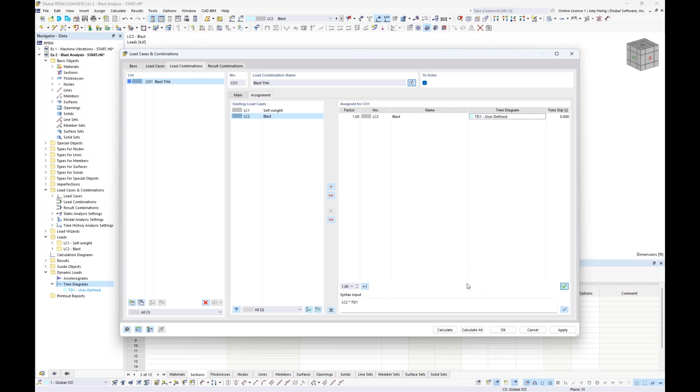Okay, so now that these are set and correlated, again, how this pressure is going to vary over time, we are going to run the calculation. It should be known that we're not running through the modal analysis, but rather directly to that time history analysis. With the Newmark solver, it does take just a little bit longer.

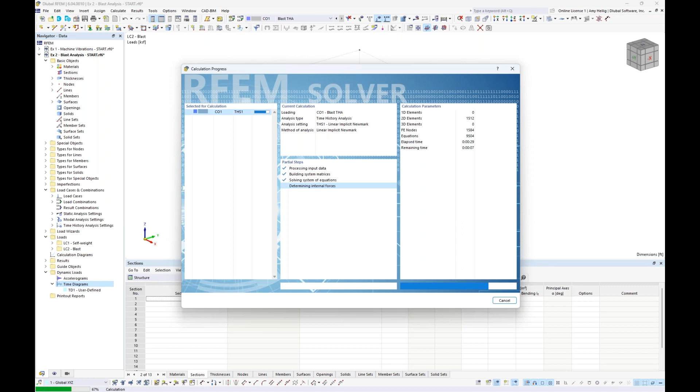And I had mentioned that when we were talking about the modal solver, it is a bit quicker, it's more precise, but can only be used when we have adequate mass participation and we're carrying out that modal analysis with relatively low number of mode shapes. But regardless, we'll carry out the time history analysis here for the full 1 second duration.

And once those results are done solving, we see them presented here back in RFEM. So we'll go ahead and turn off the display of our loads. So you'll notice initially we have the time history analysis available in the navigator, same concept for the table, just like what we saw in example 1. And if we toggle to the time duration of 0 seconds, as we would expect, that pressure wave has not been applied to the structure yet.

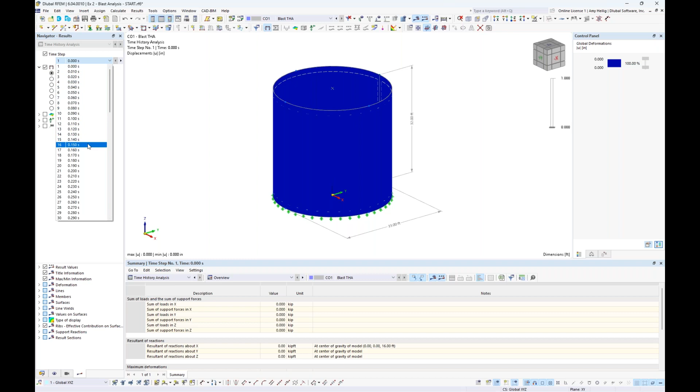But if we cycle down here and choose time equals 0.15 seconds, this should be the highest global deformation of the structure because that's 100% of that pressure wave being applied. And then as we cycle through these additional time steps further out, we're going to see that deformation slowly decrease because we're going to apply less and less of that pressure on the structure.

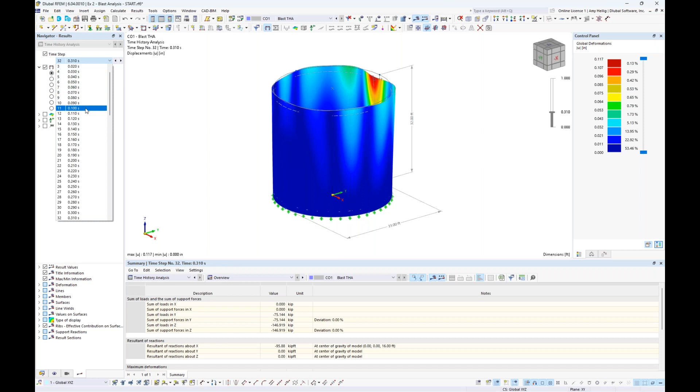We also can view information, if we maybe back up here to 0.15 seconds, such as the surface stresses. So we can activate here the stresses. Maybe we're interested in the von Mises stresses. So we find that under the equivalent stresses here, we can activate von Mises, and we can go ahead and see this graphically within the structure. Now, this is all for this particular time step.

So again, keep in mind if you're interested in an envelope solution, let's say showing the maximum von Mises stresses, we would just need to simply turn off this checkbox. This is going to show us, based on what we have set here under the envelope value, either the max or the min von Mises stresses over the full 1 second duration.

So again, we want to turn back to our initial navigator here to access our calculation diagrams. So we'll go ahead and create a new calculation diagram here, and we're going to activate the time history analysis. We only have one time history analysis under the load combinations available. Notice that the program automatically defaults here to this first option, showing us the maximum deformation of the entire structure over that 1 second time period.

And exactly as we would expect, what we see here is the max deformation around time 0.15 seconds until that load dissipates based on the time diagram that we have defined. We also can take a look at not necessarily just the global deformations of the structure, but we can choose, again, specific nodes to view those global deformations, accelerations, and so on.

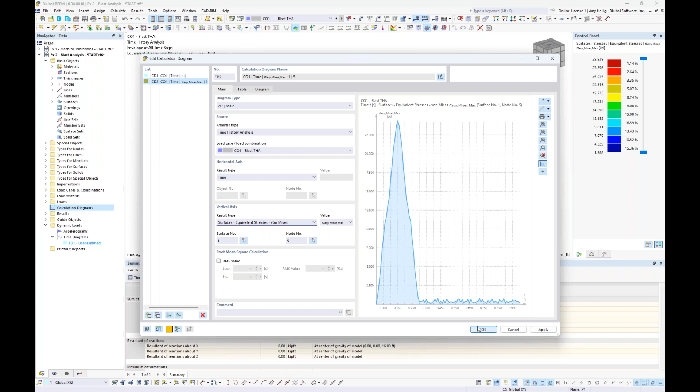Okay, so that should give us just a very quick example of a blast analysis and how we can also utilize the time history analysis add-ons. The final thing that I just want to quickly point out is we might be wondering, how do we combine the results of our time history analysis with additional load cases or additional load combinations?

So you'll notice back under the base data, first of all, I haven't generated any load combinations automatically to the standard, but you could certainly turn this on here with this checkbox and select the ASCE 7 or the NBC. For today, everything was code independent, but what I did turn on was the result combinations, and we get this additional tab here, and we can also activate what we call sub results.

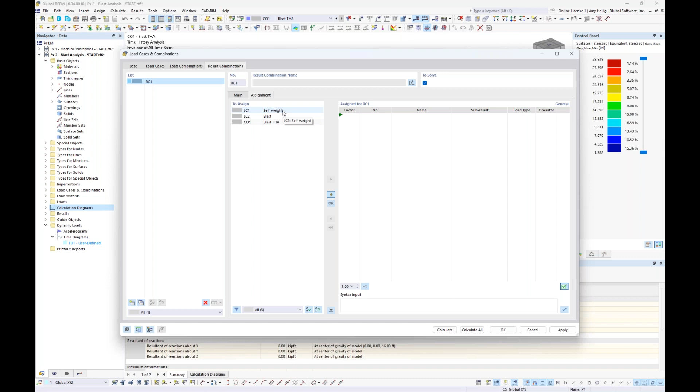So now with the result combination, I create a new definition type, and this allows me to combine any load case, load combination with those dynamic analysis results. So for example, if I wanted to combine self-weight with the time history analysis from the blast, we can go ahead and do so by moving both of those over here on the right.

Now, it should be known that these are linearly combined because we take the results from load combination 1, we add them to the results of load case 1, and we add them to the results of this time history analysis. So everything is done linearly. The load type can be set here to permanent, so if we always want self-weight acting, same concept for the time history analysis. Transient just means is it alternatively acting in order to give us the worst case scenario or envelope solution here.

The sub-results option that we checked under the base tab here allows me to choose a particular time step. So for example, if I choose time step number 16, these results will then be combined with self-weight. Alternatively, if I'm interested in an envelope solution, I could choose this option all. So that way the envelope results of the max and min are combined with the self-weight.

We can create multiple result combinations here, combining different time steps. We can rerun these calculations down here at the lower right-hand corner, and then we can view our results just like what we've seen up until this point.